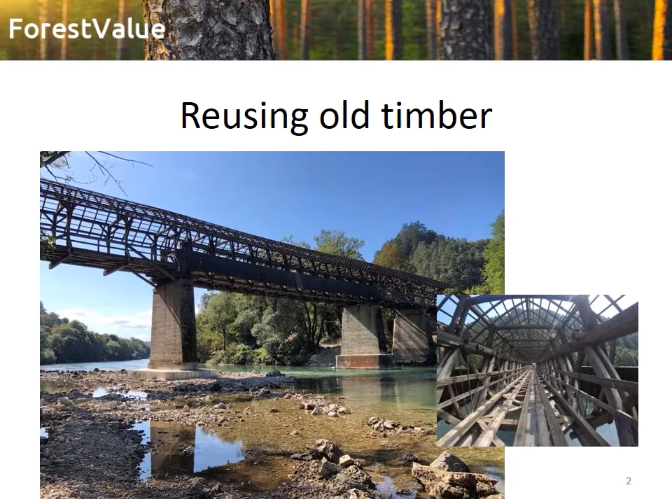Second structure is the roof of a historical building which is a part of our faculty. The roof is being replaced this year, and so we could save some beams in order to test them later. The third one is a small terrace roof of a typical Slovenian house, and we have done this research during the last year.

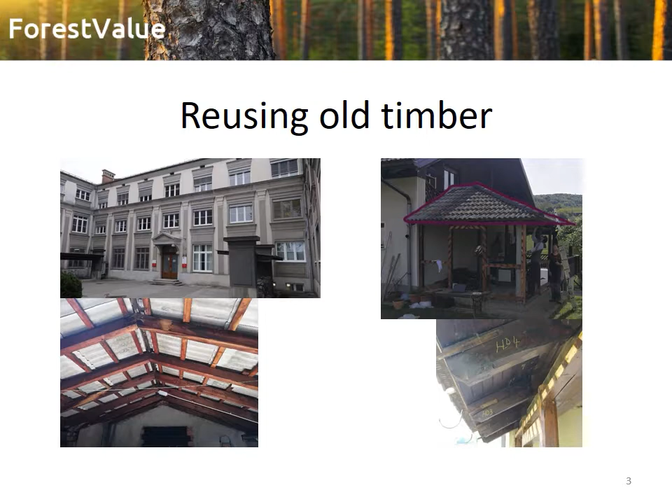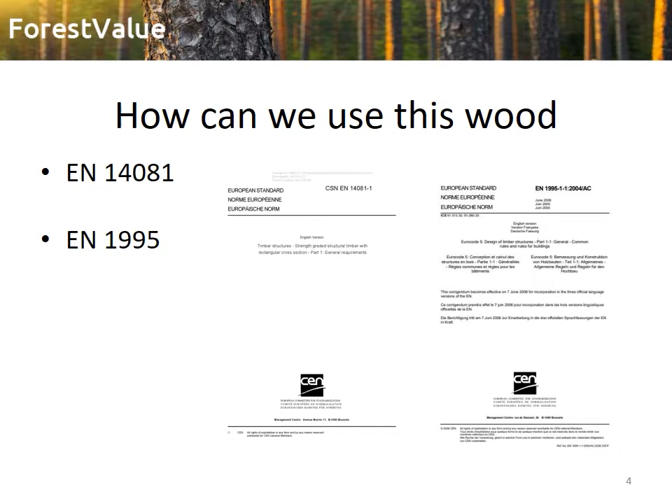If we want to use reclaimed timber for structural purposes, we run into a problem. There is currently no option to grade this timber based on any standards. The existing standards are good for new timber, but there is nothing there for used timber or old timber.

With new timber, we have two options of grading, visual or machine. For old timber, we could use each of them, or both in combination. And we could even think about grading based on the intended end use of the old timber.

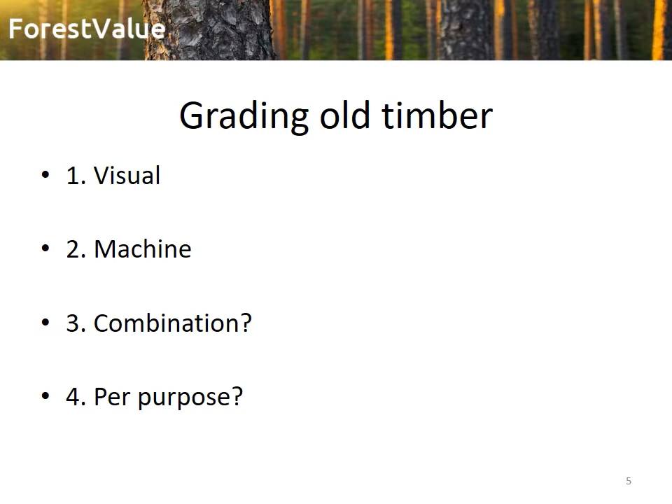Before we cut into the wood and reshape it, we have to ask ourselves, what can this piece of wood be most useful for? What is the most we can get out of it? What will be the price of it? Is there a customer that wants to use it as is? What will be the end use for it? What will be the expected load on it?

Will the timber hold this load? Can we estimate the strength and stiffness accurately enough to be on the safe side even after another 30 or 50 years? These are all different questions that require an answer.

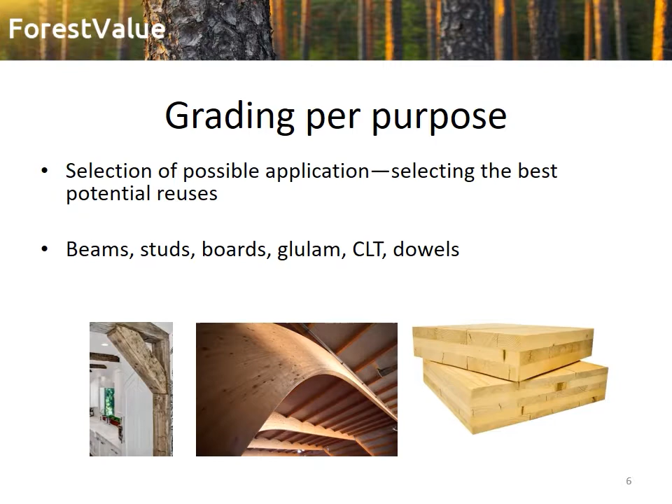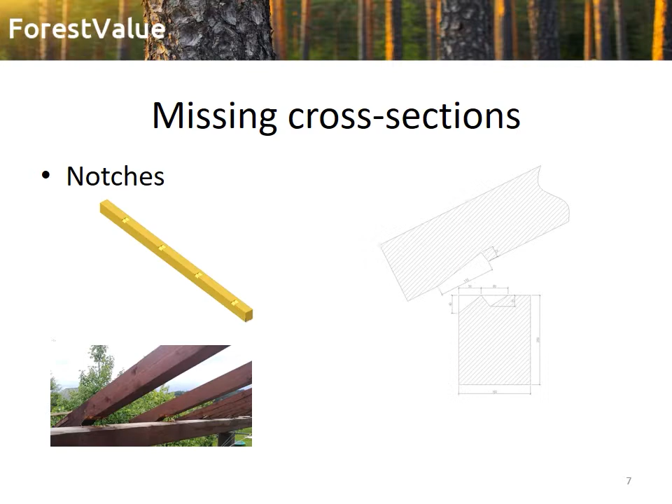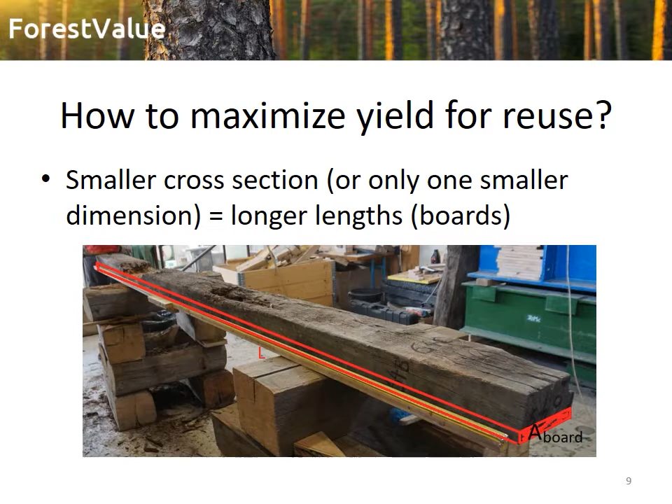With reclaimed timber, we often have parts with missing cross-section due to previous joints. The extent of these notches might differ very much, and sometimes it would be a shame to cut out all the material. Local rot or other damages have a similar effect. We could decide to make shorter beams with the cross-section intact, as is shown in this figure. Or we could opt for a smaller cross-section, but to use the whole length of the beam.

To evaluate the effectiveness of visual grading generally used in new timber, but now used on old timber, we measure various visual parameters based on different European standards. Those are dimension, knots, slope of grain, ring width, different kinds of pith, fissures, and then different kinds of deformation like crook, cup, bow. Of course, discoloration and the presence of insects.

In addition to that, we have acknowledged some other things. First, with recovered wood, some of the characteristics such as knots, fissures and insects need to be measured again. For example, fissures are now much bigger and longer than they were when the wood was new. In addition, rot, nails, notches, water damage, fire damage need to be measured and taken into account.

We also added an additional item, and that is what we call best used for, with subjective consideration of the person who is evaluating the timber element.

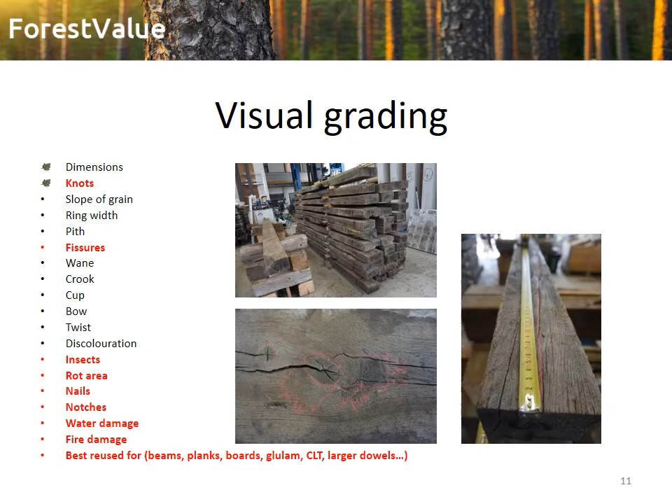When we measure the knots, we also come across rotten knots, which is not the case with new wood. And there is another question we would like to answer. Are rotten knots different from sound knots mechanically? How much different?

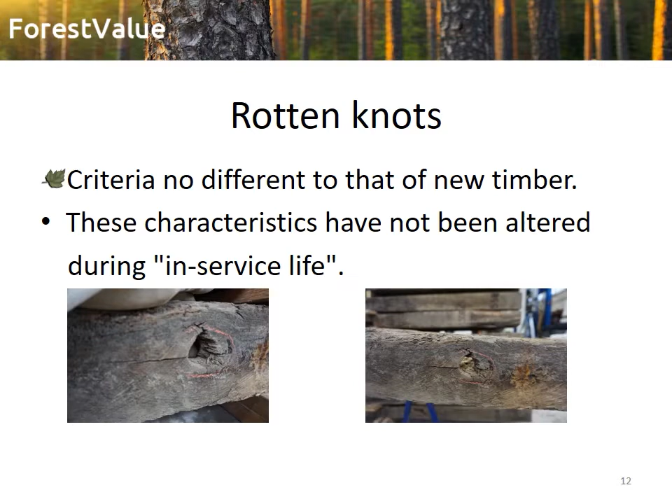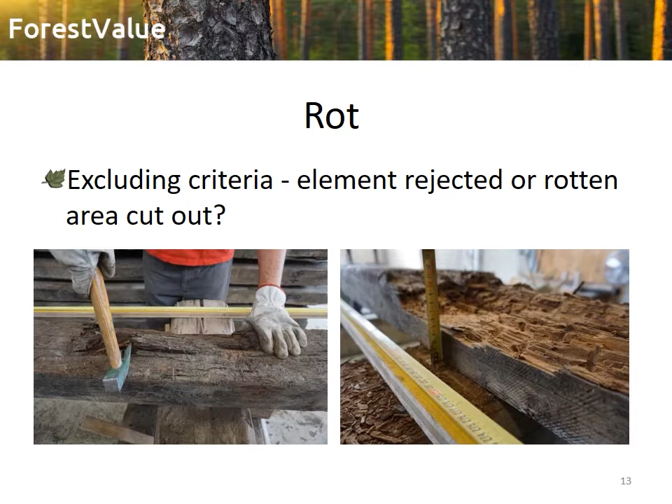When we think of rot, we need to ask also if we should reject those elements altogether, or can we cut out the rotten part and use the rest of the wood? As you can see, we have easily cut some parts that were completely rotten from the beam in question.

We could also disregard the rotten part in the structural calculation and use the beam as a whole. Sometimes this character of wood might be desired. Plus, in this case, we would be storing more and emitting less carbon.

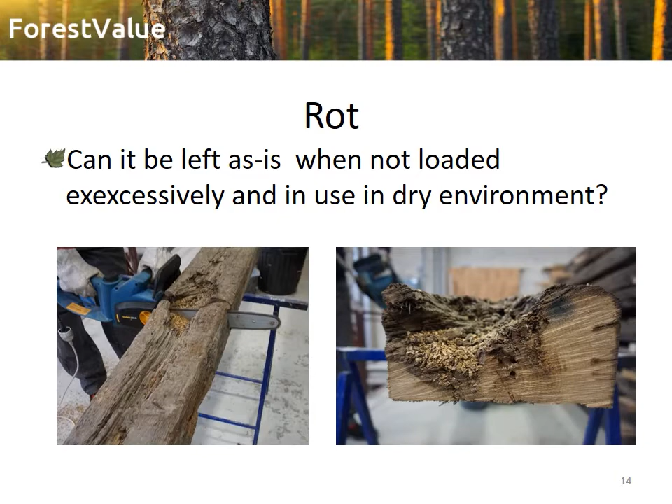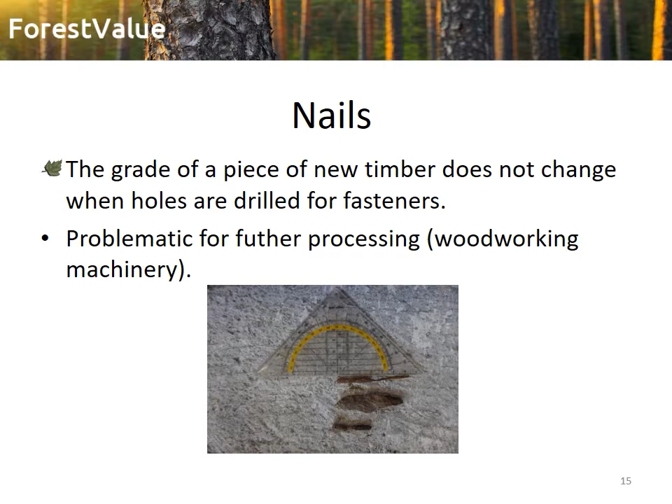Nails. In structural terms, the presence of nails is not important, but they are a major obstacle, the major issue for further production, as they damage the cutting knives. And actually, we don't really like them in timber. But they are there, and sometimes, I should say often, the nails are too corroded to get them out.

To still use this wood, an option might be to hammer the nails further deeper and brush or sandblast the elements to get a cleaner surface finish. Of course, this can only be done when we use the timber as is.

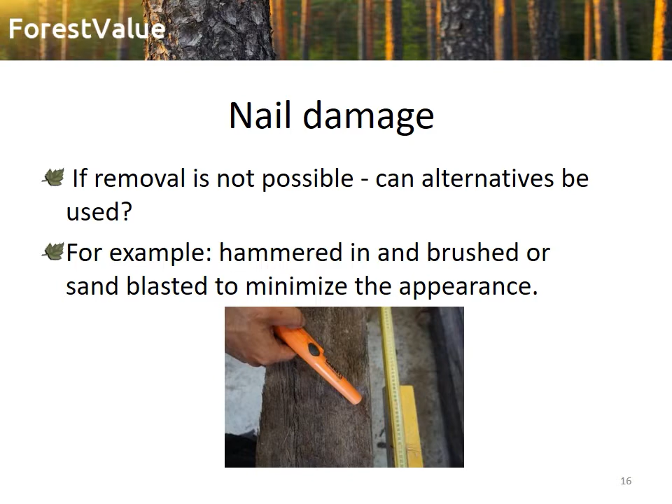According to some visual grading standards, small insect holes are allowed in new timber. But of course, with new timber there are usually not many. But with old timber, the extent and the effect of it can be much greater.

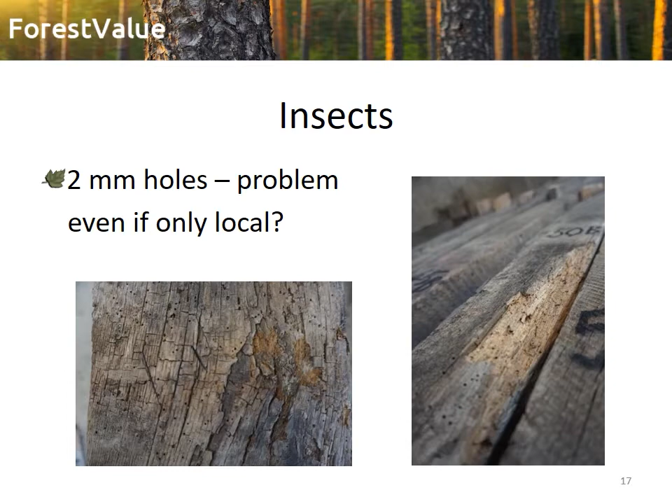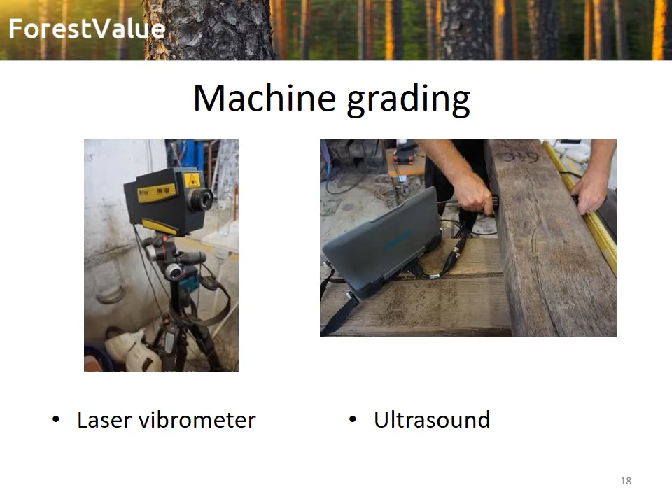Now we are switching to machine grading, to measuring by machines. Different instruments were used to see if the correlations between the measurements and the mechanical properties are similar to those used in new timber. We measure the first eigenfrequency with a microphone, laser vibrometer, and ultrasound.

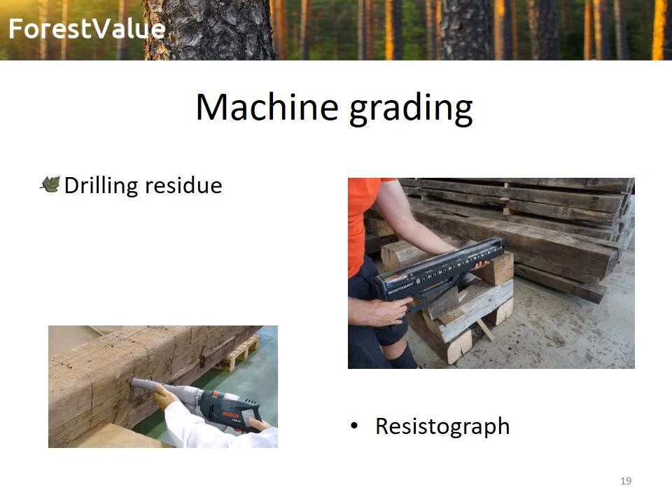We are now in the process of testing oak beams. Those are the beams measured in flat face position. The displacements are measured by the GOM system using high resolution photographs.